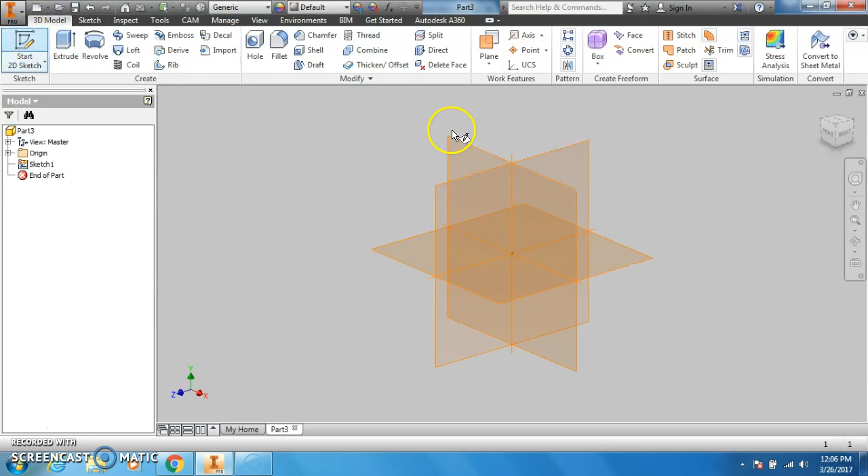So we're going to do a standard IPT, and we're going to create a 2D sketch. And this time we're going to start by drawing a rectangle.

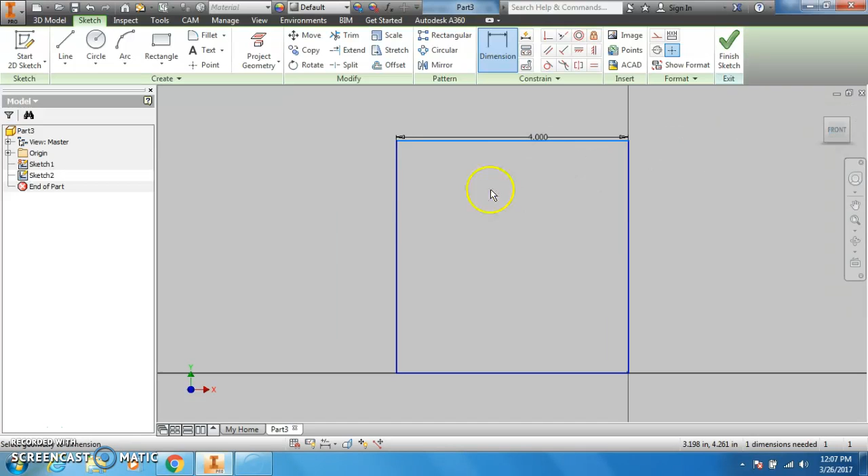So this rectangle is going to be 4 inches by 5 inches. I'm going to draw a rectangle that is 4 inches by 5 inches.

Now inside this rectangle we're going to make a bunch of lines to make all of these features. And when we're done, I'm actually going to be able to show you some cool stuff.

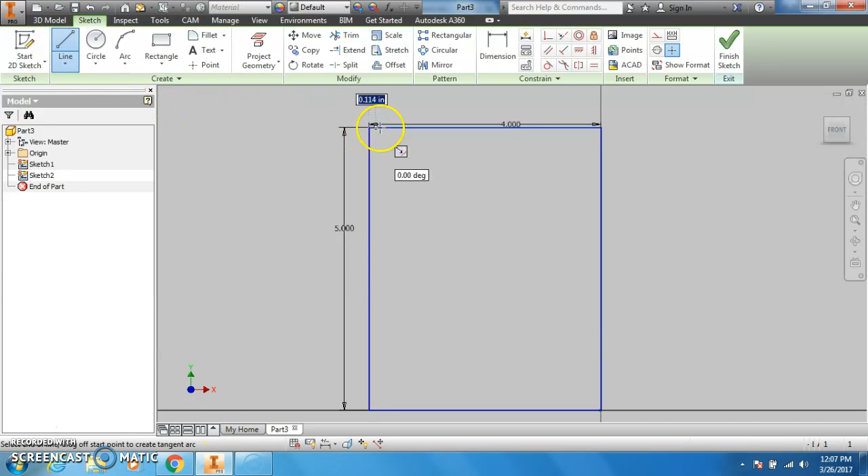Okay, so we're going to draw a line here, 1/2 inch. I'm going to draw a line down. I'm going to draw a line here. And I am going to make this line 1 inch.

And I know that that line is 2 inches up from the base. So I'm going to make sure this line is 2 inches up.

Then I'm going to draw this line, which the dimensions for this line are a little harder to determine. So we got to actually look over here.

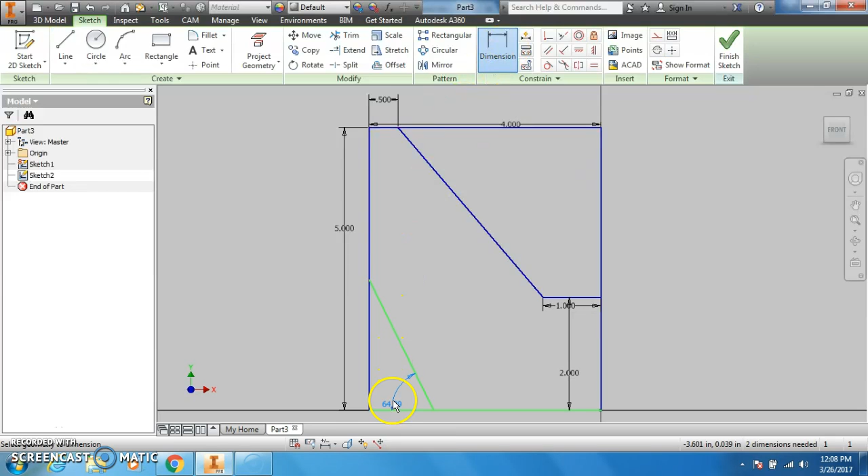So it's 2 inches up at a 60-degree angle. So I know I'm going to make a line here to here. I know when I dimension the angle, it's going to be 60 degrees. And I know that it is going to be from here to here, 2 inches.

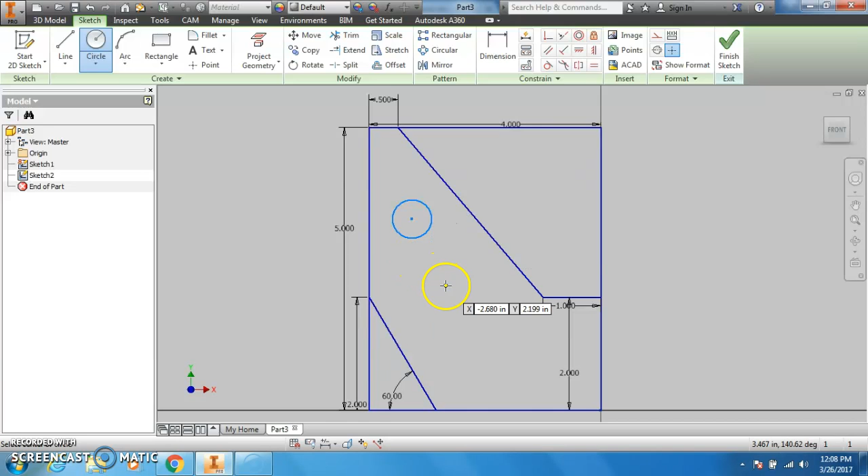That's the lines. Now I'm going to add in the circles. So there's 3 circles. 1, 2, 3.

The big circle is 0.875. And the 2 smaller ones are 0.375.

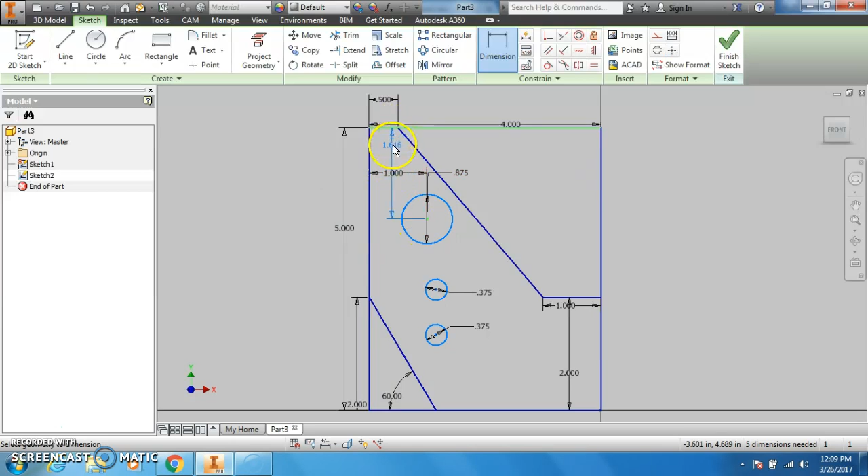And then I gotta add some dimensions. So it's 1 inch from the edge, 2 inches down. So the point is 1 inch from the edge, 2 inches down, and then each subsequent circle is 1 inch down.

And from here to here this way is 1/2 inch. Do that twice if I have to. And then from here to here, it's also 1 inch.

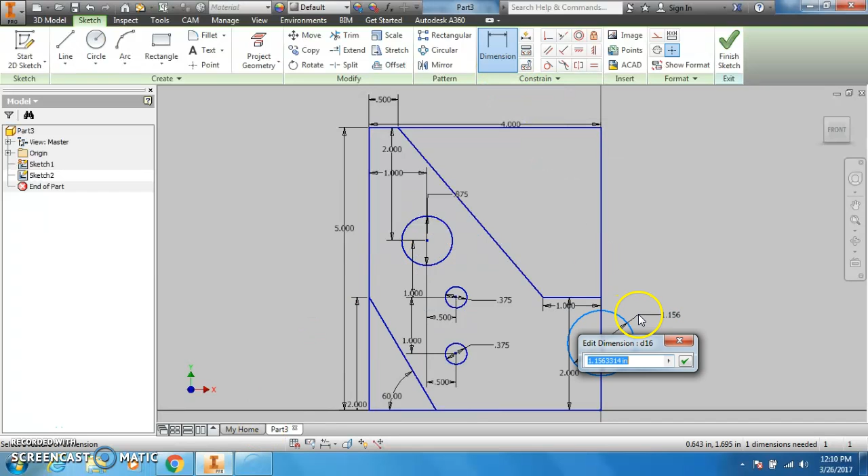And the last thing we need to draw is the big circle. So the big circle is, you can take your pick, it's 1.25, and we'll do the 0.875. And then from here to here is 0.875.

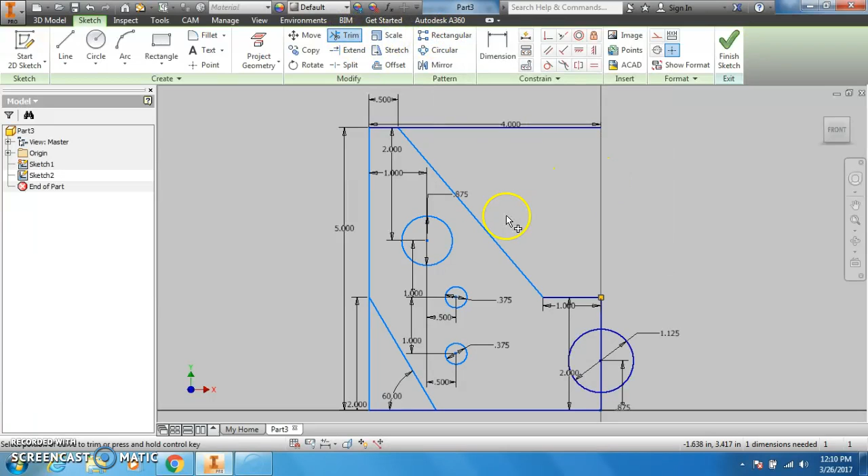This is good. Now from here, I'm going to start trimming stuff. Some of it might not let you trim. Like this should be pretty good. That line's good. That line, it messes you up because you got dimensions.

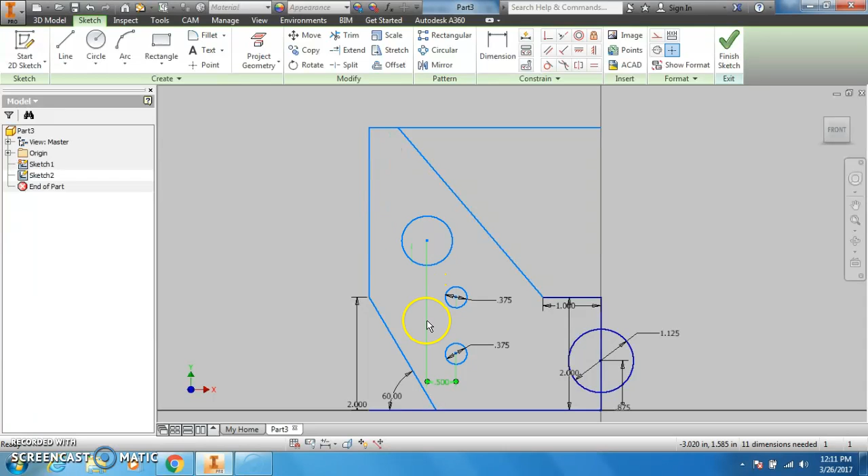So what I'm going to go do is actually come in and start deleting all the dimensions once you get them in there. You can only do this when you have all the dimensions you need in here, and you can't delete anything after you start doing this.

So now I can trim this line, and I can trim that line, and I'll come in and get this line later. So what I'm going to do now is I'm going to mirror it.

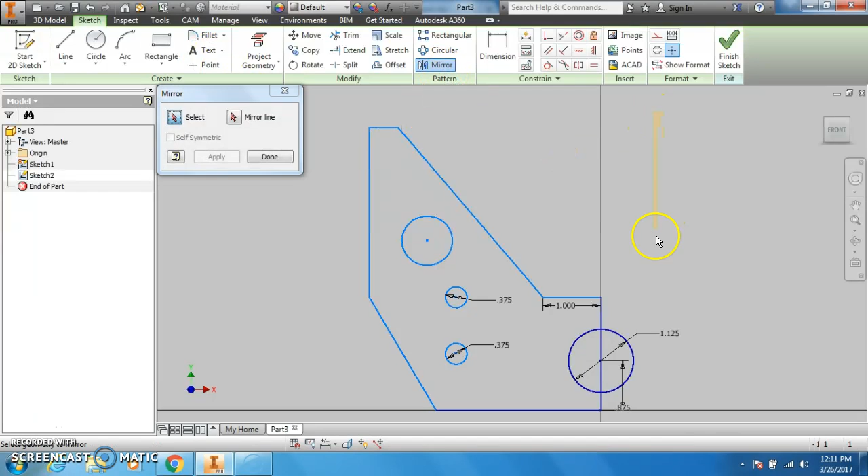So to mirror it, I'm going to select everything. I'm going to pick the mirror line, which is this one in the middle. I'm going to hit apply. And it will do all of that work we just did again. I'm going to click OK.

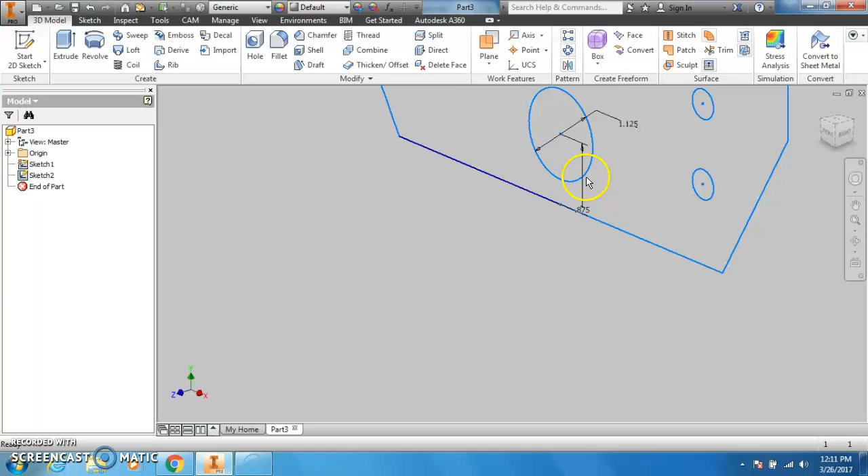Now I can come in and delete the middle line. And if we are lucky, it should extrude for us. And it does. So we will extrude it to 1 inch.

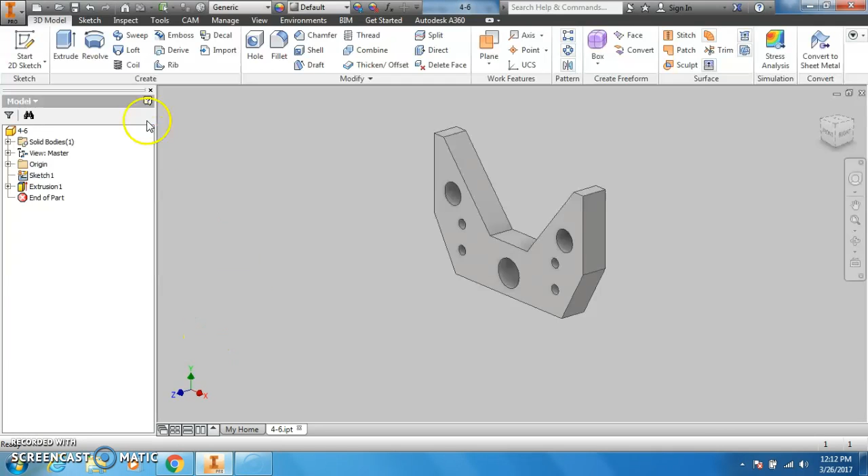And that is how to do the IPT, which I'm going to save as 4-6. Now I'm going to go to the GTT IDW, and this is where it gets a little bit more fun.

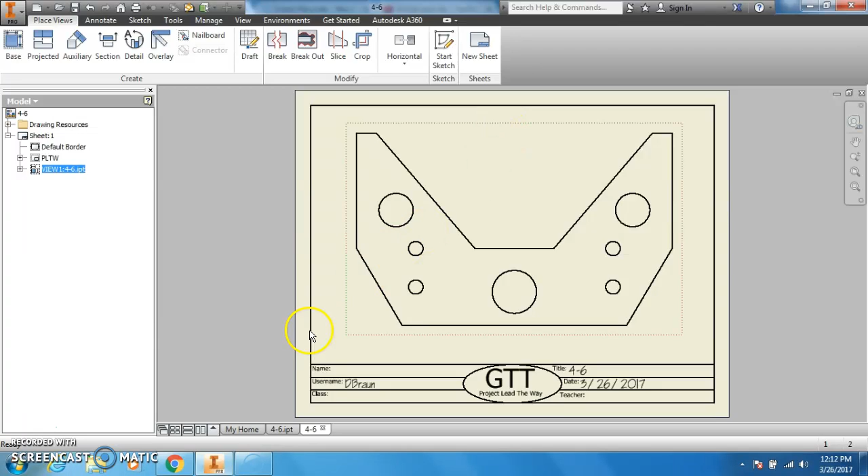This one we're going to bring all the way to full scale. I'm going to get it on there. We're going to center it. And then we're going to add all of these dimensions.

And I'm going to start by trying to add just the 4s in there. Let's see what happens. Maybe throw the center mark on the circle. Add the 4s in there.

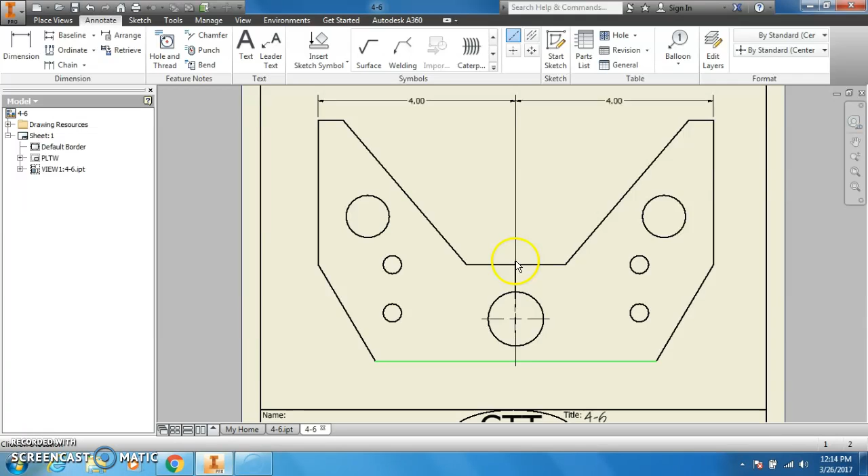And then see if I can actually change this to a center line, which is easy to do in some versions of Inventor, but more difficult to do in others. So it didn't come out too well, so I'm actually going to leave it like this for now.

I know that I got to add this 1/2 inch in here. I believe most of the circle dimensions are off on this side. We're going to have to add some stuff there.

We're going to move this up. And for both of these, we got to add how many times? So this one is 4 times. This one is 2 times.

Add all the center marks on here. So I'll get the rest of our center marks in there. Very important.

Let's look at what else we got. We got the big circle down here. We've got to get these dimensions in here. So let's see if we can get that done.

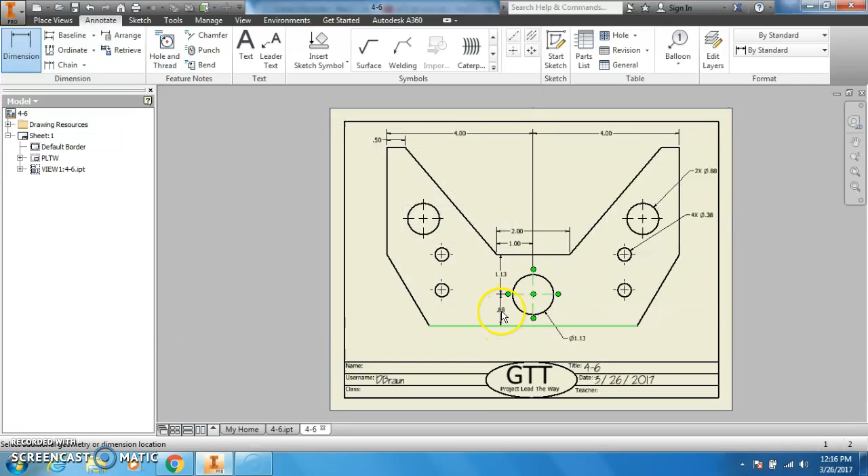We've got to do these 2 from here to here, and from here to here, keeping them lined up nice. We've got to do all of these.

So this is called a continuous dimension. Do it to save room. So we do 1 overall with a continuous. And then we do several in this fashion. 2, 3.

We're going to have to do the angle on this side with the overall. Starting to come together now.

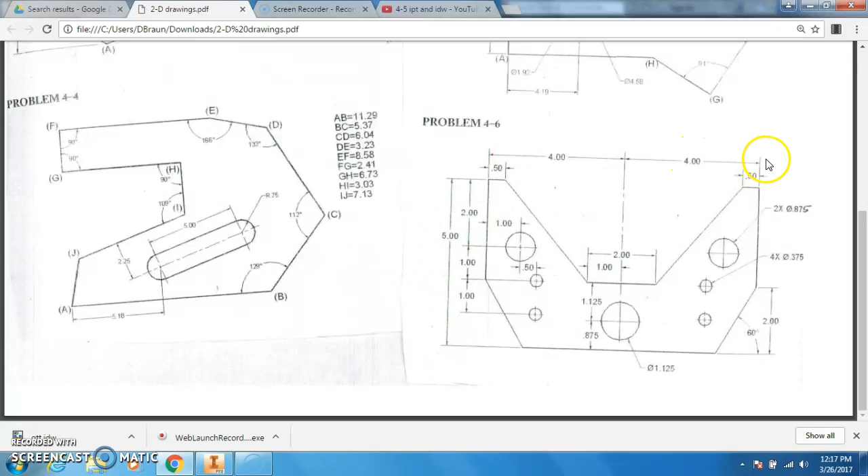We got this, we got this, we got this. Got that, we got that, we got that. I believe we just need these 2 dimensions.

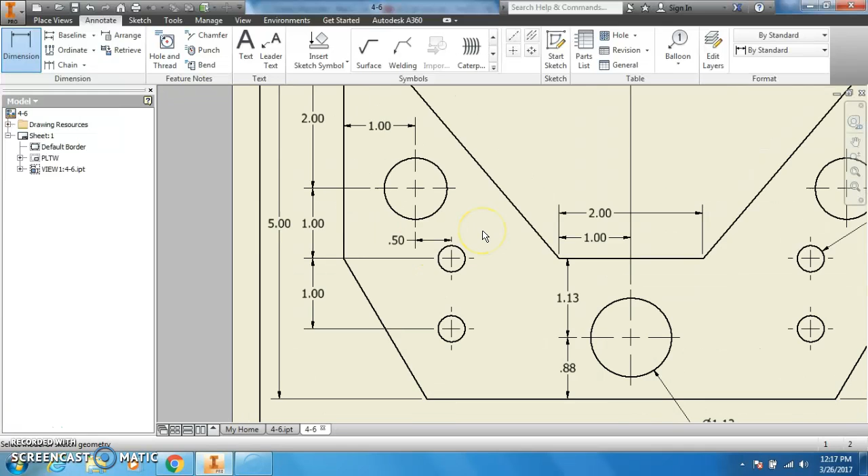So I need this guy up here. And then we need from here to here. And from here to here. And I believe that is all the dimensions we require.

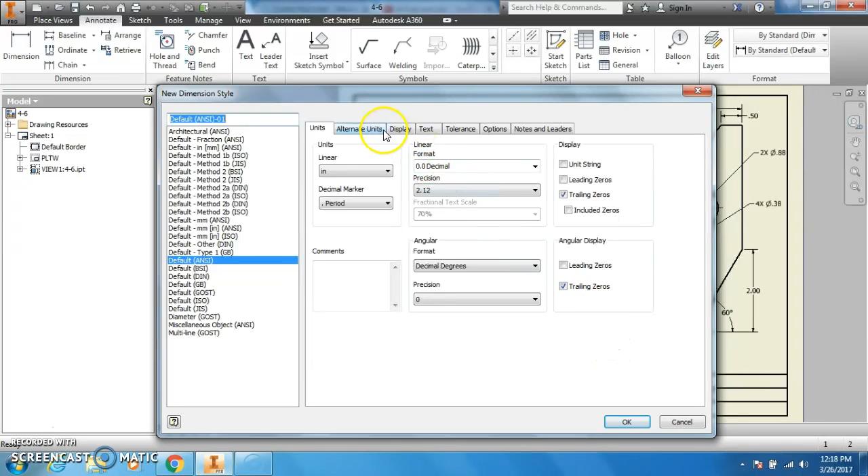There's one thing we do have to do. If you look at the units on some of these, they don't match ours. And the reason for that is the precision.

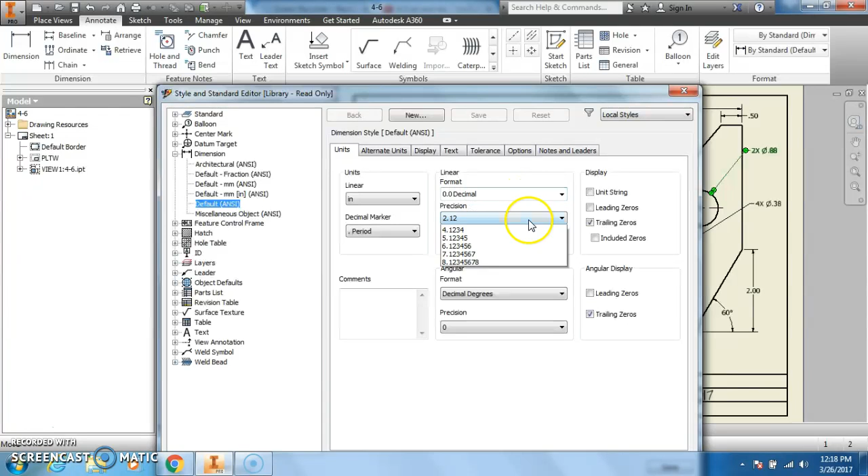So if we edit dimension style, we can change the precision. So if we do that, it should help. And there we go.

We got all of our extra values, no more rounded off. So that is how to do this shape.